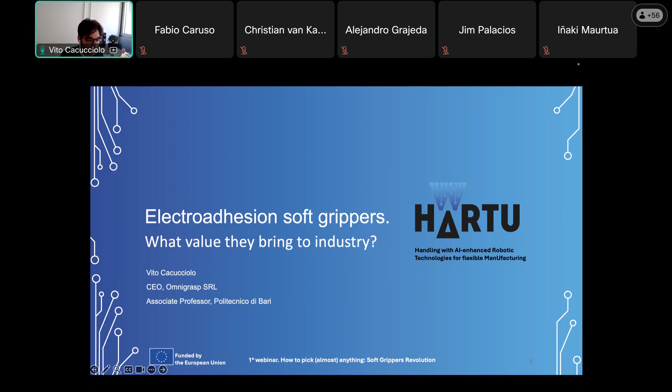So a few words about myself. I'm a mechanical engineer by training. I've got a PhD in biorobotics at Scuola Superiore Sant'Anna, Pisa in Italy. I worked as a scientist at EPFL for 5 years, where I started to work on electroadhesion in two of the world leading labs on soft grippers with electroactive contacts - the labs of Professor Dario Floreano and Professor Herbert Shea. I then started Omnigrasp as a result of the research developments we made during these years, from 2017 to 2021. Omnigrasp was incorporated as a company in Italy in 2022, so it's a pretty young company.

In parallel to being the CEO of Omnigrasp, I'm also an academic. I'm an associate professor now at Politecnico di Bari. I'm an ERC grantee - I received the ERC starting grant from the European Union last year. The project, my ERC, started this year, and it's about artificial muscles, so a complementary but different technology with respect to the one I'm going to present you today. And I'm also a research affiliate at the Massachusetts Institute of Technology since 2022.

The problem that we started addressing a few years ago when we began working on soft grippers with electroactive contacts is the fact that traditional robotic grippers are no good when handling objects that are delicate, made with soft materials, as you can see by the scared strawberry on the left. They also have a pretty hard time picking up objects with widely variable shapes and sizes.

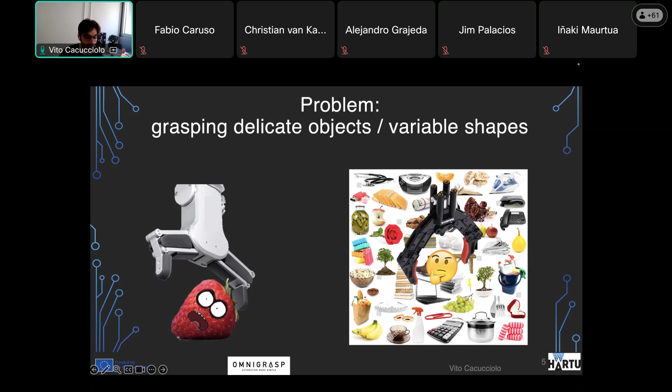So how can we solve this problem? My background is in soft robotics, so together with my colleagues at EPFL, we started investigating how we can use a combination of soft materials and intelligence in the mechanics—what we call mechanical intelligence—and clever physical principles such as electrostatic forces that make it possible to create adhesion without any glue, an adhesion that can be turned on and off electrically.

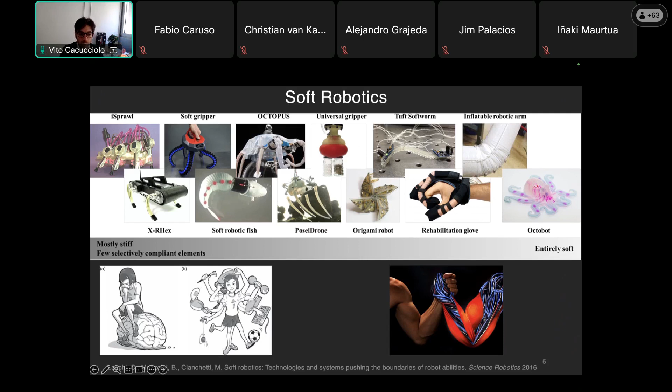By combining these elements—electrostatic adhesion, soft materials, and what we already knew about grippers and grasping—we created this soft gripper enabled with electroadhesion. In this embodiment you see in the video it has two fingers, each a thin silicone membrane with electrodes in it.

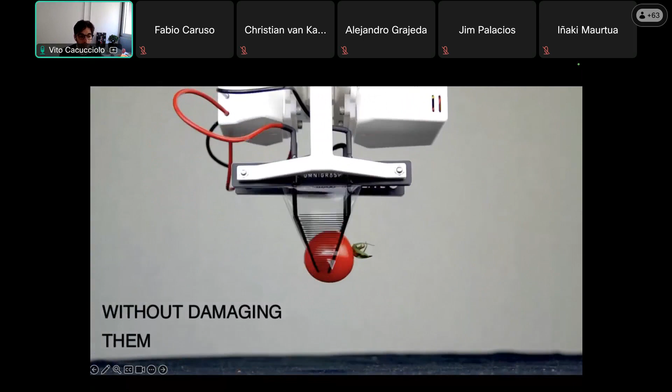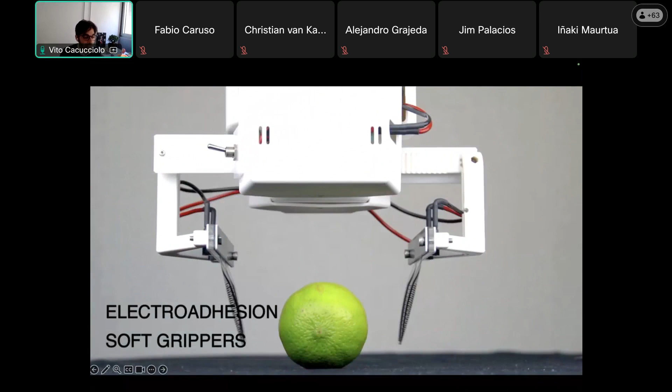This gripper is able to pick up a wide variety of objects. What's special is that it can do this without modulating the force it applies, because the fingers are so thin and soft that there's no way they can damage the object. Even if the positioning is wrong, even if they hit the object, there's no risk of creating damage or leaving a mark.

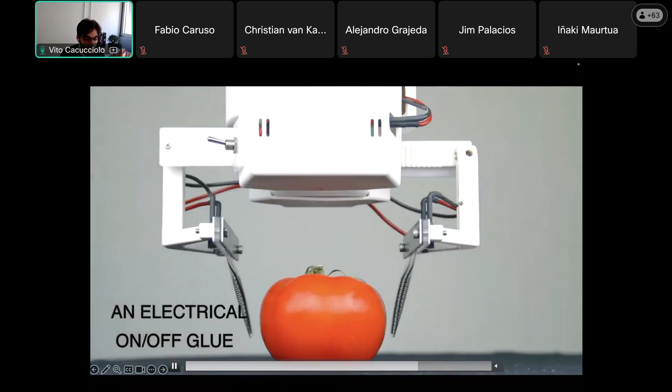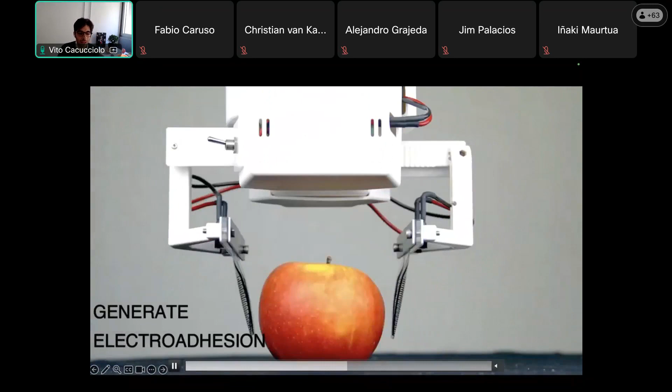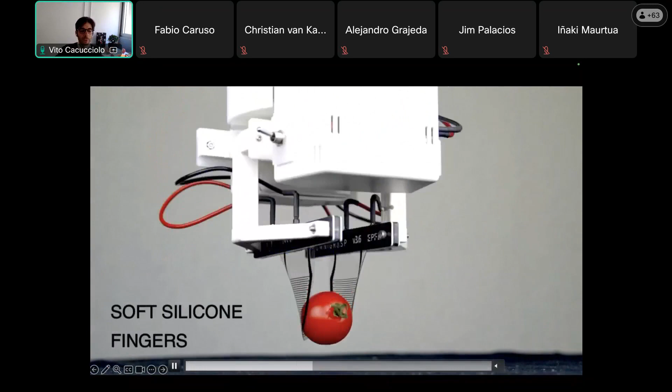At the same time, we engineered these electrostatic forces after many years of research to be able to lift heavy weights—not just the few milligrams we're familiar with from rubbing a pen on a shirt to pick up tiny pieces of paper. Those are electrostatic forces too, but we engineered ours to pick up kilos, through a combination of materials, geometry, and understanding of contact mechanics.

As I was saying, electroadhesion works like a glue. When the fingers contact the object, we turn on the voltage on the electrodes embedded inside the fingers. This voltage creates an electrostatic field that, due to how the electrodes are engineered, works like glue, creating mutual attraction between the surface of the object and the surface of the gripper. The two stick together, and we can lift the object to pick it up.

I mentioned before this has quite some background. The first publication on this topic is from my colleague Jun Shintake at EPFL in 2016. He made this gripper using a combination of artificial muscles and electroadhesion—a great innovation. When I joined EPFL, I started working with him, pushing this technology forward from a low TRL proof of concept to something more robust that could be used in industrial scenarios.

The second video you see is one of my developments. I made this soft gripper so strong that we were almost breaking the rigid plastic frame when testing it—it was able to lift unexpectedly large amounts of force. I'm going to tell you what changed and why this became possible.

Then we started studying contact mechanics, understanding things like peeling, and we added an extra degree of freedom to open and close the gripper so we could always have optimal contact, because we understood that was essential for grasping objects effectively.

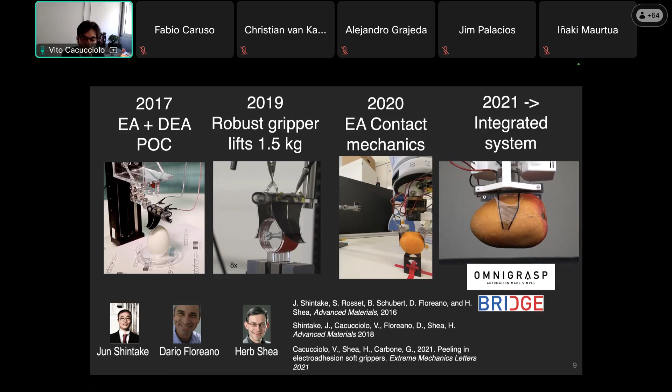And then we created Omnigrasp. We started receiving funding—the first came from the Swiss National Science Foundation—and we created prototypes that are now more industry standard, around TRL6, able to pick up large objects, adapt to different object shapes, and be controlled electrically with a computer and microcontrollers. This created momentum for the innovation that followed.

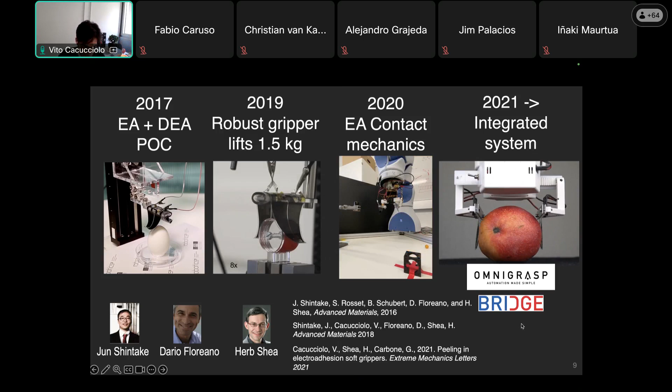So this slide is just to tell you that we have quite some background. I would say we are among, or probably the world experts on electroadhesion soft grippers. The technologies we developed, that we now have at Omnigrasp as pilots that we are implementing in industries already, come from over 10 years of university research. We have published more than 10 scientific articles on the topic that are widely cited.

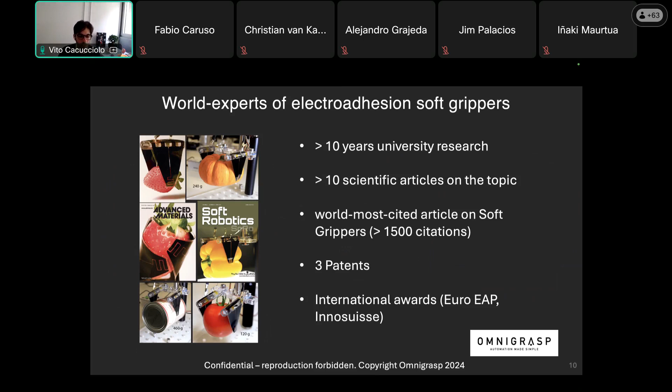There's also a little medal of honor. We published the world's most cited article on soft grippers overall, not only electroadhesion soft grippers, but all kinds of soft grippers. It's an article from 2018, and it already received more than 1,500 citations, which is incredible. We have 3 patents on various technologies, we are still patenting at quite a fast pace right now, and we received several international awards.

So let's dive a bit into the research that made all of this possible. One of the key innovations, one of the key things we understood for making these grippers so effective, is that electroadhesion was known already since many years. There are quite a few labs in the world that use electroadhesion, that developed it, that made different ways of fabricating and applying it. But most of these grippers were not good at picking up objects with complex shapes and different sizes. One key element we understood was the role of peeling.

We understood that electroadhesion is, at the end, not very different from all the other kinds of adhesion. I worked with colleagues here at Politecnico di Bari, like Giuseppe Carbone, who is an expert on contact mechanics. For the first time ever, we put together those two worlds, electroactive contacts and electroadhesion, and the world of contact mechanics. We developed a model that we decided to publish because it was so good we didn't want to keep it only for us at Omnigrasp, but wanted the scientific community to know about it and be able to use it. In fact, I've seen many grippers after this start to use movable fingers, following what we developed and invented.

Because we understood that by having the optimal contact angle between the electroadhesive and the object, we could change the force generated by orders of magnitude, going from millinewtons that people often got when approaching objects with the wrong angle, to kilograms - which is what we need in industry for pick and place of objects. This model was published in 2021 in Extreme Mechanics Letters, and it's also a highly cited paper.

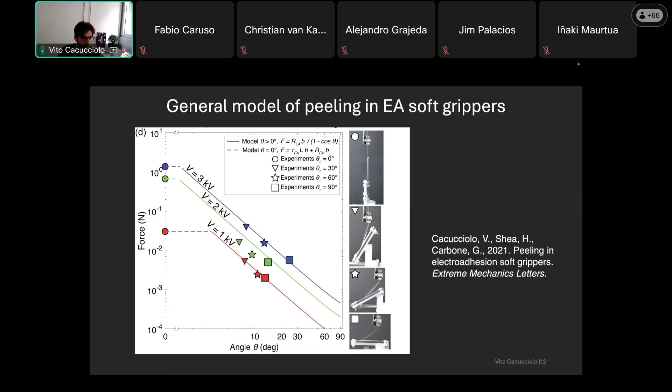Then we went a step forward. This was with my student at the time, Massimiliano Mastrangelo, a PhD student at Politecnico di Bari. We moved a step forward to say, okay, if we have peeling, we understand the force is very low, so we want the fingers parallel to the object. But then what happens if we go underneath the object? That was another important understanding - if you go underneath the object, the physics changes a bit. We developed a model that explains why the force keeps pushing forward and actually increases exponentially with this angle of wrapping of the fingers on the object.

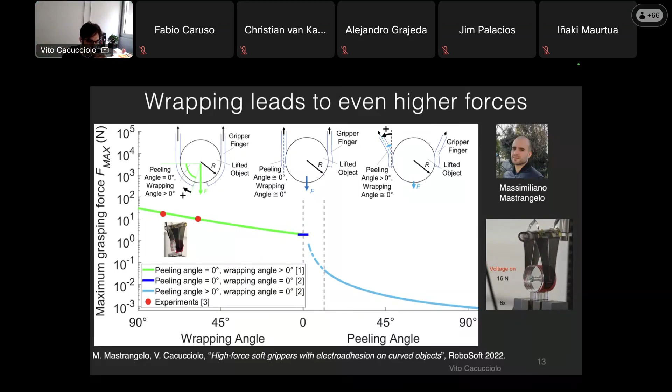This is what made possible the crazy stretching and huge weightlifting ability of this gripper from a few years before. We observed this, but we didn't understand why it was the case - we couldn't model it. Then with Massimiliano, this became possible, and we published an article on this topic too.

But then, knowing we wanted to wrap around objects, we started wondering how can we do that? We don't want to add actuators, because that's bulky, makes the electroadhesive more rigid, can damage the object, and makes the system more complicated. So can we directly use the electroadhesive to wrap around the object?

Here came another very interesting study with Massimiliano again, and also Fabio Caruso, a PhD student just finishing now at Politecnico di Bari, and again with Giuseppe Carbone, who understands very well the interfaces between different objects and the contact at the interface. We understood how to make the fingers spontaneously zip onto the object, even at large curvatures, small curvatures, large bending angles - like the one you see in the video - by properly designing the mechanics and the electrical part of the electroadhesive finger.

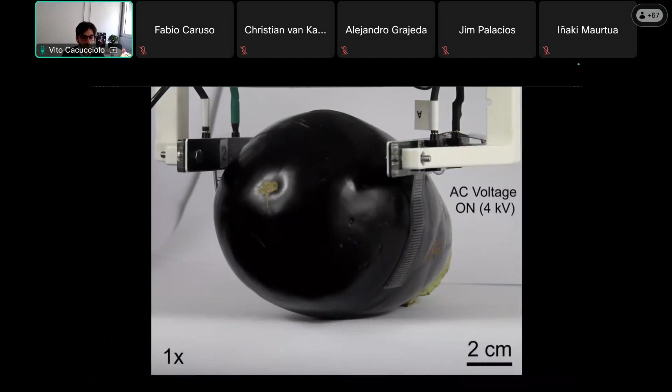This was another very important breakthrough that, again, we decided to publish because we want the scientific community to know about it. It made it possible for our grippers to spontaneously adapt to objects of different sizes and shapes without having to add external actuators. So it's possible to design the fingers for a given curvature.

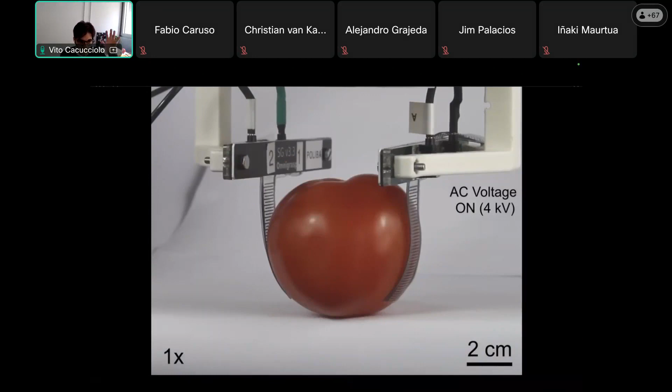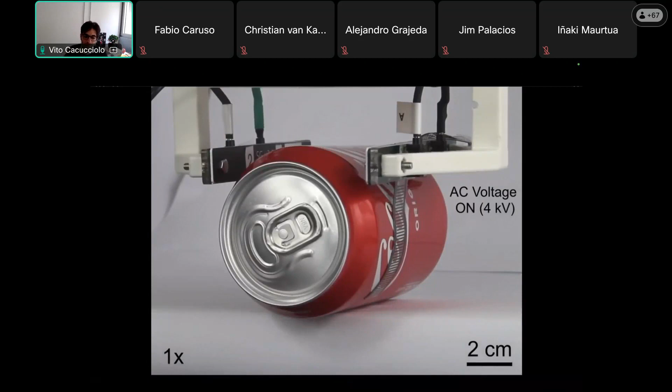So if we know that we want to grasp objects that have a minimum curvature of a given value, or a maximum curvature of a given value, then we can now do so. And we decide how thick the dielectric needs to be, how long the fingers need to be, how much voltage we need to apply in order for this to happen.

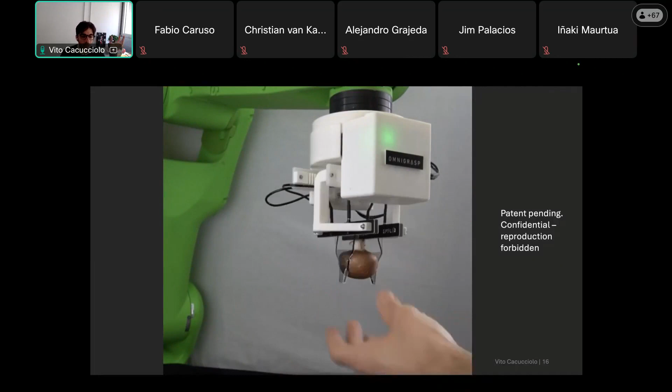So all of these technologies combined made it possible to develop these grippers that I was showing at the beginning, that can adapt to a lot of different objects, that can go from small to large, heavy to lightweight, and made of different materials, from plastic to food material, metals, cardboard. This is really remarkable, how adaptive it is and how robust it is also.

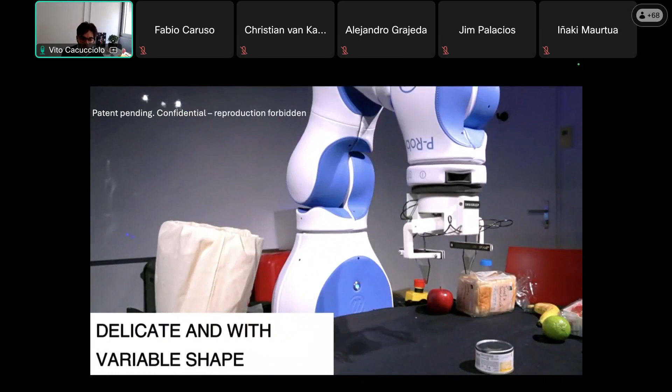So this demo here, the gripper is basically blind. It's grasping objects, just adapting passively to its shape and size. We are only telling it where the object is and how much it needs to close, but very roughly. And that's it, no sensors, no feedback loop.

Then, of course, we want sensors and feedback loop. Now we are developing them, and for example, they are part of the HARTU project. But of course, as you can imagine, it's much easier to sensorize and make smart a gripper that intrinsically, mechanically, by its own physics, can adapt to the object, rather than something that, if you don't put a bunch of sensors on it, is just going to crush your object.

And so you have to be very careful with your sensor. You need very high computational speed. While in our case, for our grippers, it's relatively easy to sensorize them, because just a little bit of extra smartness is enough to make those grippers really adaptive and intelligent.

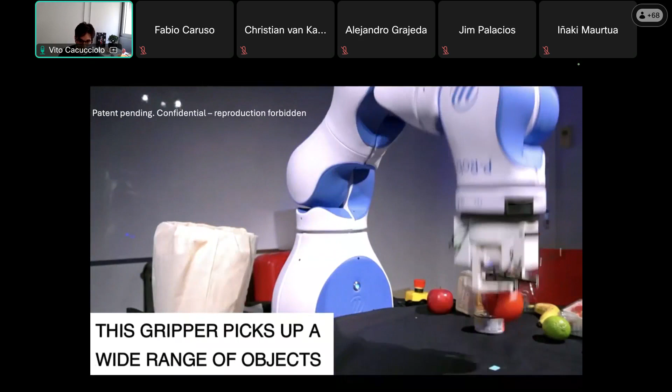So here came a first project funded by the European Union, which is the Merging project, that we kind of joined in the middle because one partner left, and then we were the ones that had the right technology for the project. So we joined 1.5 years ago, and the goal of this project, because the project is finished now...

It was closed at the end of last year, was to help bring back some manufacturing to Europe in those fields where there has been a lot of outsourcing to developing countries because of the intense labor that was required. In particular, one of the industries that we focused on is the textile industry, where robotic automation is pretty difficult because picking up textiles is very hard.

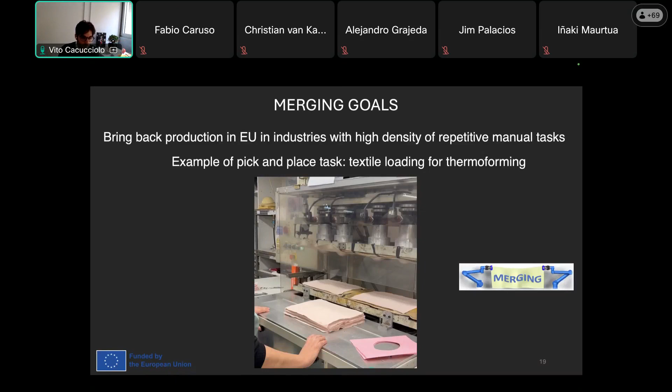It seems pretty easy, but the very hard part is, how the hell do we grasp a stacked textile? How do we grasp a piece of textile when there are other textiles underneath? That's very hard for a robotic hand. And we thought electroadhesion would come in handy here, would make it possible to do this kind of difficult grasping.

So when I was at EPFL, when this was developed initially with my colleagues Herb and Krishna, we invented this method for grasping, where we use electroadhesion only to lift one of the corners of the textile on top, which is something that electroadhesion can do very well. It's very difficult to lift the whole textile unless we use a rigid gripper that is the same size as the textile, because the electroadhesion pressure we can have on textile is not very large.

Because, you know how textiles are, there is not a lot of density of material. They are pretty empty. So electroadhesion needs to grab onto material, and if there is no material, there is nothing to grab onto. Then we found this way around where we only grasp a corner.

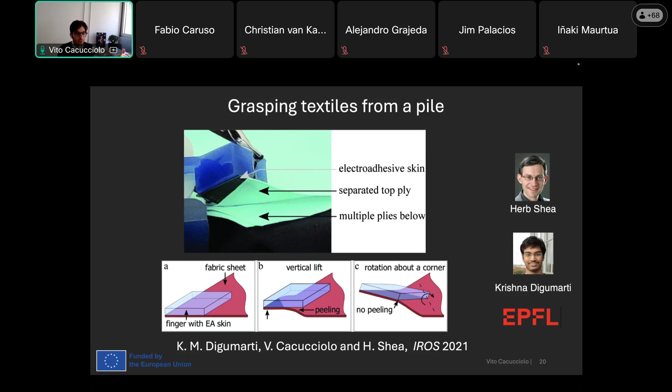You can see a video here that shows how this is done. And again, by our understanding of peeling, we designed the kinematics of this motion. This is something we deposited a patent on, the kinematics of the motion, so that the peeling wouldn't happen and wouldn't let the corners slip down.

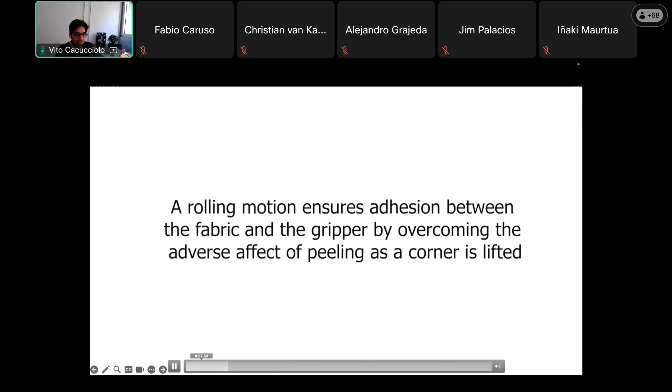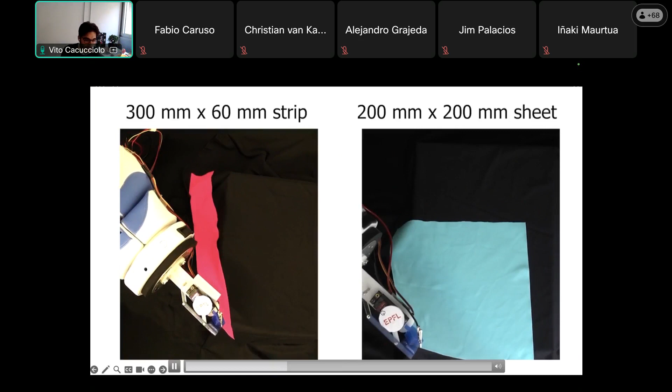And then, after we peel the corner, we are now able to pinch the textile, and at that point, after pinching, everything becomes a piece of cake. It becomes easy to move the textile around as we would do with our hands, as the operator does at the moment. And so we demonstrated that it was possible to pick up textiles of different sizes and shapes. And since it's on the corner, the textile can also be all crumpled, and we can actually open it up.

It doesn't have to be nice and flat to start with. But there were some problems with this gripper. As you can see here, the kinematics is not very well developed. The connections are, well, as you would do in a lab for a demonstration. The kinematics is such that we can also only pick up from the corner of the table. So this was no good, of course, for industrial use.

Then we pushed forward the innovation here at Omnigrasp during the project merging, and we created a different kinematics that can now pick up from any point on the table. And the gripper was industrialized. It was made more compact with connections all included, made robust so that it could last for thousands of cycles.

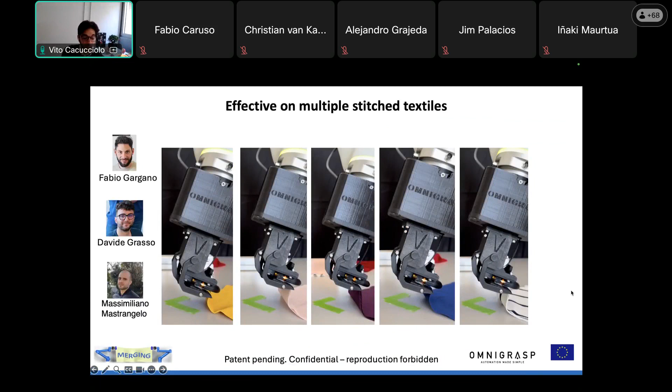This is work done by my colleagues at Omnigrasp, Fabio, Davide, and Massimiliano, who at the time, after his PhD, had joined Omnigrasp. And the results were fantastic. We were able to pick up a wide variety of textiles and to pick them up from any point on the table, repeatedly. So now we can pick up even stitched textiles, and we can separate layer by layer.

And this is one of the examples of the testing that we did. We designed an automated testing setup where we could test for thousands of cycles and check that the system was robust and repeatable.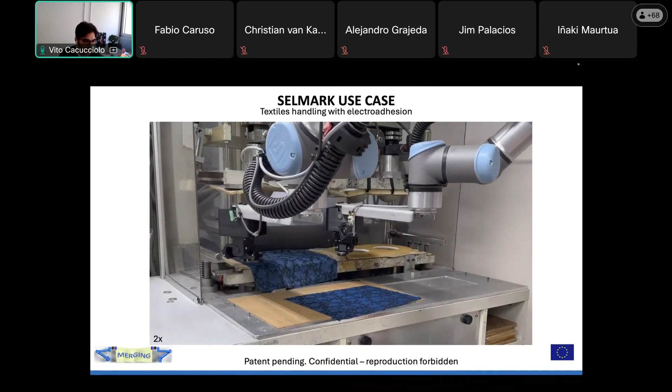Finally, at the end of the project, with our colleagues at Timon and all the support from the other partners, we integrated this at the facilities in Selmark, and we demonstrated that it's actually possible to do the machine tending that we were supposed to do with this project. So you can see here that we separate a piece of textile and do machine tending inside the heat press. And here is another example with another textile.

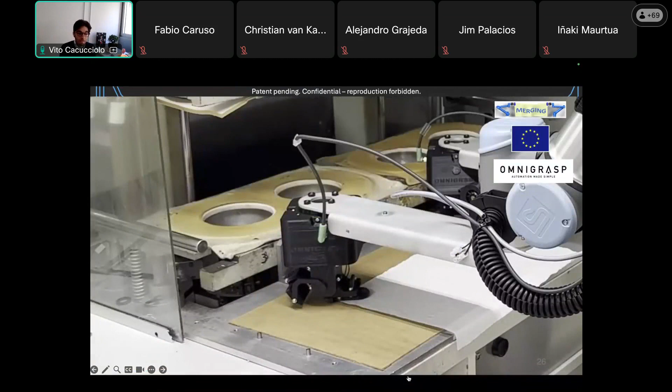So here there was a big step forward made also for the integration, because one thing is developing one device, another thing is developing the device and making sure that it can talk with all the rest of the system, with computer vision, path planning, robotic arms, the machine that we have to operate. So everything was put together in a nice system, and we demonstrated it could work well.

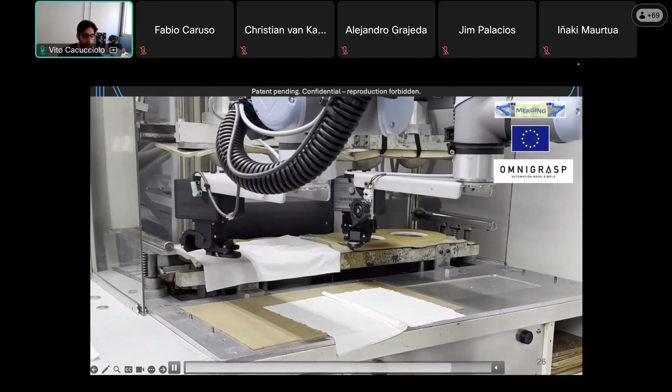And this is something similar to what we are working on now for HARTU. So developing a gripper for different use cases, but one that can then also fit in an ecosystem with all the different technologies developed by the other partners.

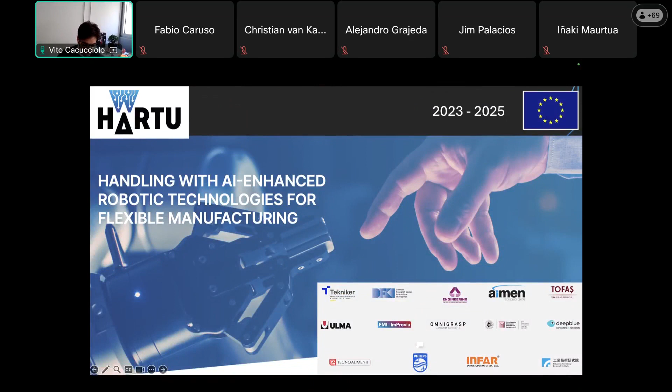And this brings me to HARTU, which, as I was mentioning before, started at the beginning of last year. Here is all the partners that form the consortium for this project. One of the use cases we are focusing on, we are back on food now, so it's a pick and place of fruit and vegetables.

And what we are planning to do with this project is to obtain seamless adaptation to different objects, so that, as I was mentioning before, we can get flexible pick and place in manufacturing. So it's possible to change from one object to the following one without having to replace or adapt the gripper, or to reprogram the automation line.

And also we want the gripper to be smart, to be able to recognize the objects and adapt its grasping posture based on the different objects and where they are positioned. And this will be done by integrating the AI technologies that the partners are developing.

This brings me to conclusion. I want to say big thanks to the Omnigrasp team that made all this work possible. I'm lucky to be working with super smart and creative people.

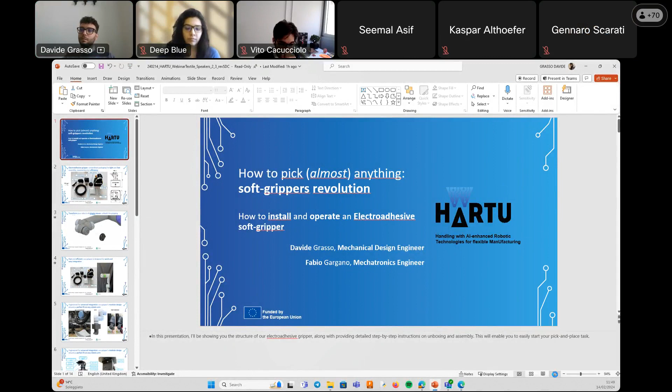Can you see my screen, right? Yes, yes, okay good.

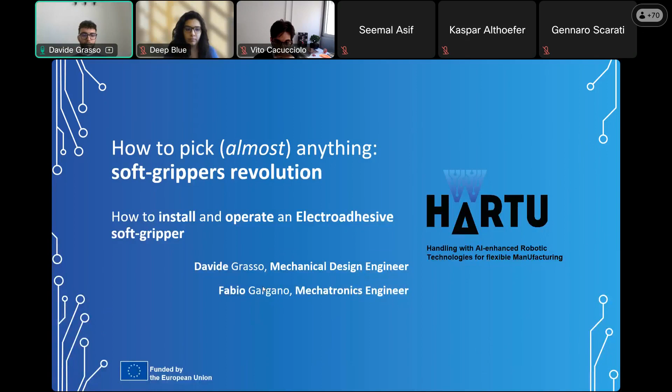In this presentation, I will show you the structure of our electroadhesive gripper, along with detailed step-by-step instructions on the unboxing and assembly. This will enable you to easily start your pick-and-place task with our cutting-edge gripper. Upon receiving our gripper, you will discover a thoughtfully compact packaging that efficiently houses the essential components. Inside you will find the electroadhesive gripper, the communication cable, and also an AC/DC converter.

I don't see your screen anymore, Davide. Sorry, I don't know what happened. Maybe try showing again. Yes. Like this. Okay, can you see it?

Yes, thanks. Okay, so I was talking about the communication box and cable, and also the AC/DC converter, aimed at continuously supplying power to the communication box. While the cable is provided as an added convenience, it's worth noting that it's not mandatory, as the gripper can also be controlled using the internal cables of the robot.

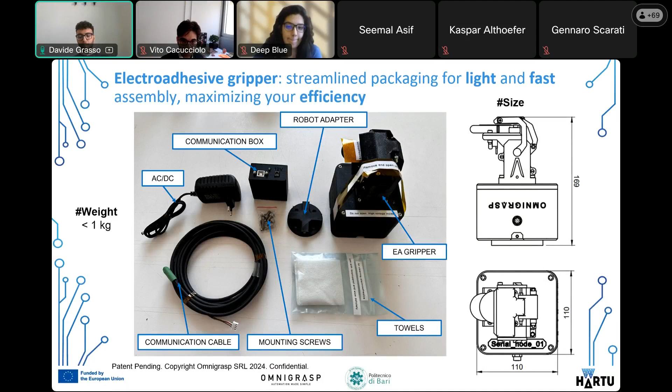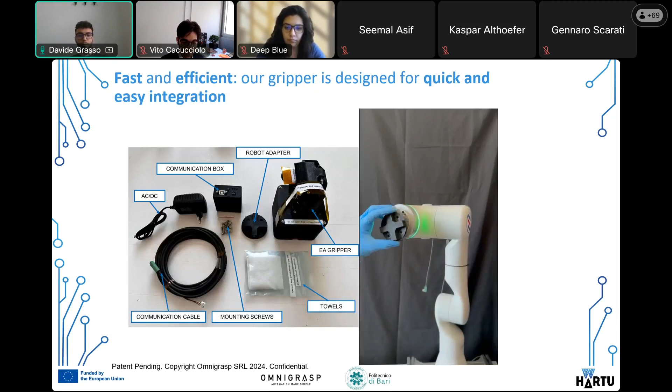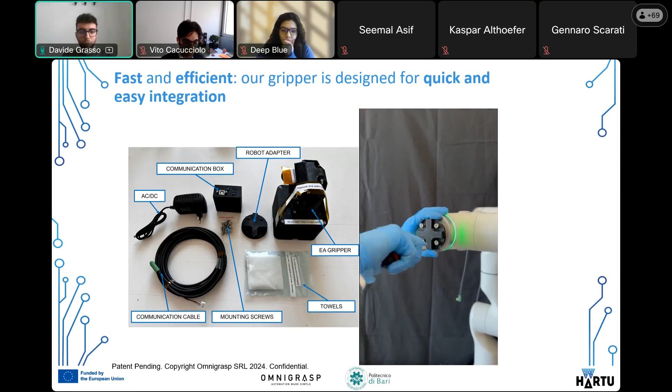Starting by placing the robot adapter on the wrist, aligning the holes, and securing it with the bigger screws using a screwdriver or Allen key. Following this, place the gripper on the adapter according to the cross path on it, and secure it with the smaller screws. With these steps completed, the gripper is now ready to be connected to the controlling computer.

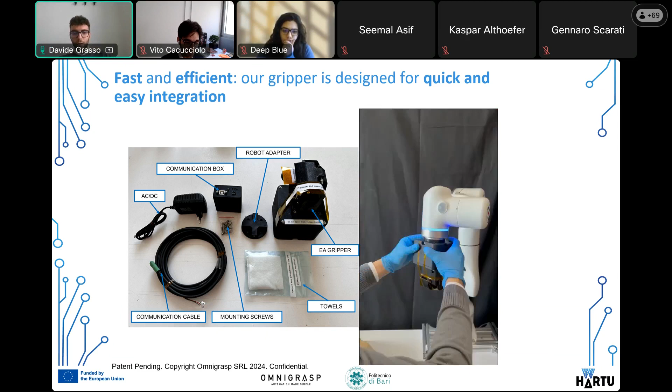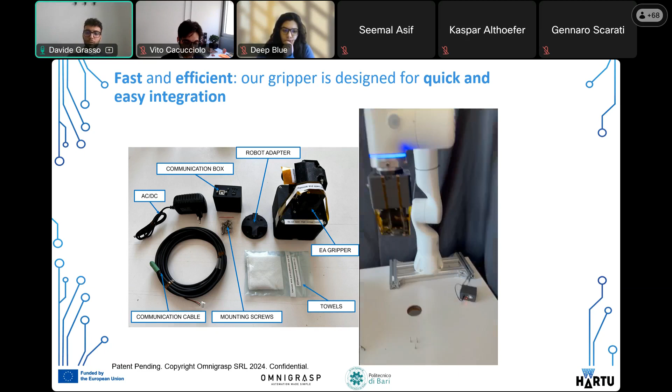The next steps involve connecting the communication box with the electrical line through the AC-DC converter provided, then plugging the communication cable's female end into the gripper's male port, fixing it with the nut provided. Subsequently, connect the communication box, establishing the link between the gripper and the controlling computer using a USB Type-B cable. This configuration facilitates seamless control and operation of the gripper directly from the computer.

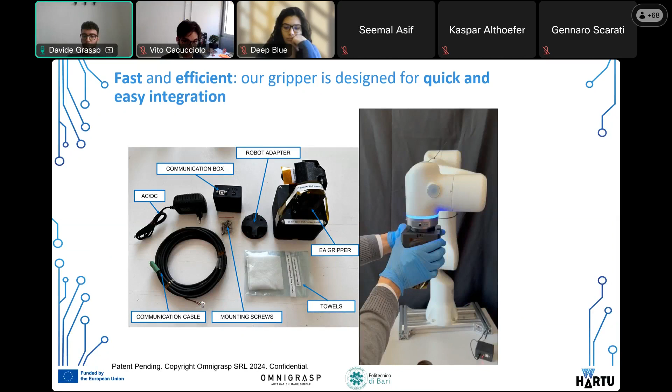As you can see, the installation procedure lasts less than 5 minutes and doesn't need any kind of expertise. Now we are done with the physical installation, and we can have a look at practical mounting.

Each robotic arm presents its unique dimensional constraints. We can create a custom-made robot adapter in less than an hour once we are aware of your dimensional constraints, by rapid prototyping with 3D printing.

After giving you a sneak peek into its assembly, let's uncover the fascinating wonders concealed inside together. As you can see, the components are numerous, each playing a specific role crafted through extensive mechanical study. For example, the TPE interface combined with the electroadhesive features make the gripper soft, proficient in handling fabrics with the utmost care, leaving them unharmed.

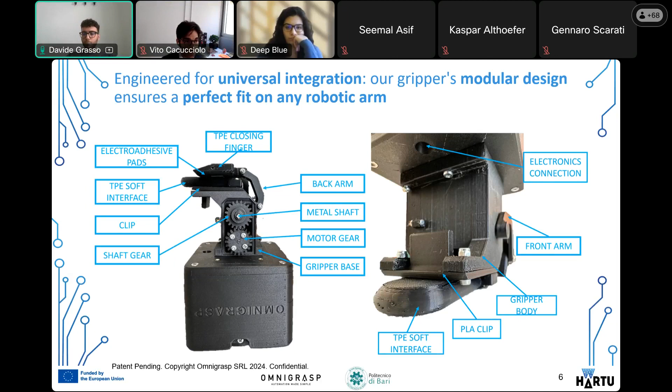Good morning, can you hear me? Yes, yes. Okay, can you share my screen? We see your screen.

Here we have an example of an operational setup configuration. The gripper is mounted on the robot wrist and ready for use. The black case encloses the power electronics within the gripper.

The communication between the gripper and the PC is allowed through an M8 cable, which transmits input and output signals. This cable is connected to the box shown at the bottom right, labeled as the COM box. The COM box allows communication between the gripper and the PC and also acts as a power supply.

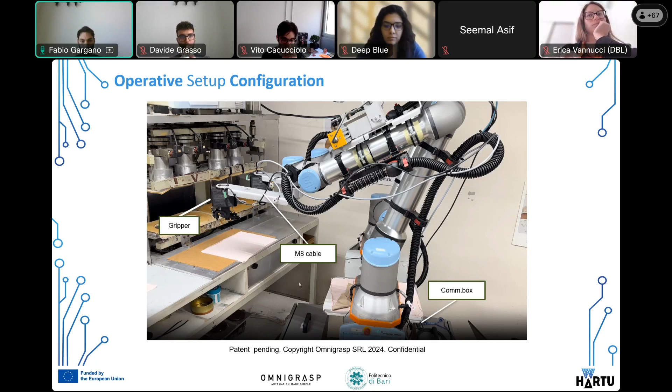These are the primary components that define the communication and power supply system of the gripper. The electronics control are completely housed inside the case, enabling communication through an M8 connector placed on the side of the gripper. The cable has two main lines, one for power and one for data. This cable connects to the communication and power box, which has two connectors on its side: the first, on the right, is a jack connector used for input voltage, 12 volt; the second, on the left, is a USB-B connector, essential to allow communication between the gripper and the ROS master.

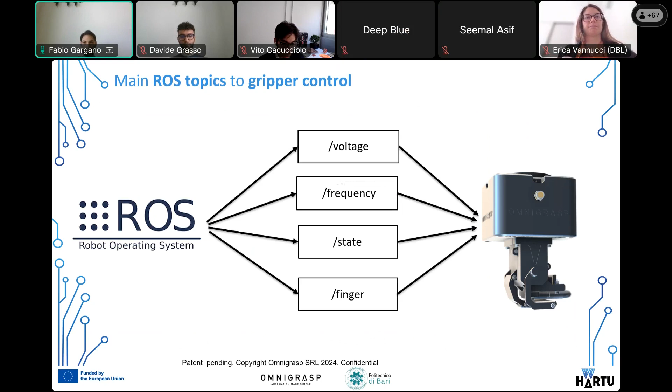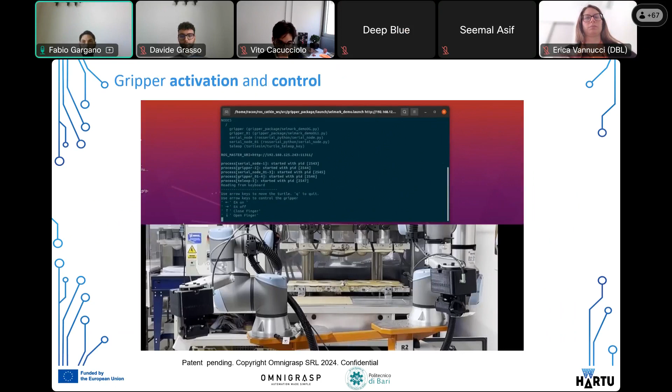To start using the gripper, connect the power to the box, then connect the USB cable to the PC. Now connect the gripper and launch ROS, so the gripper is ready for use. In this window, we are running the demo file, allowing activation and deactivation of electroadhesion, and opening and closure of the finger. This can be done interactively using a command from the PC keyboard connected with ROS.

Now we see a practical application of the demonstrator. Explore a successful case from the MERGING project where the gripper was correctly integrated at the Selmark facilities in Vigo.

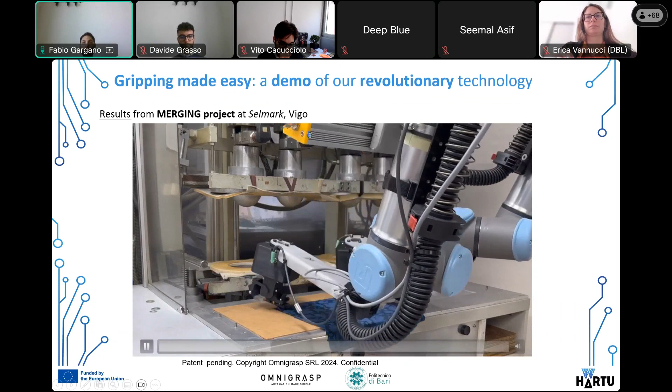Particularly, we can see how the ROS master coordinates two robotic arms that work simultaneously. The computer vision recognizes the position of the corner textile, then both robots move to this position. Now electroadhesion is on, and the gripper grasps the fabric. After this, the robot places the textile in the thermoform and releases it.

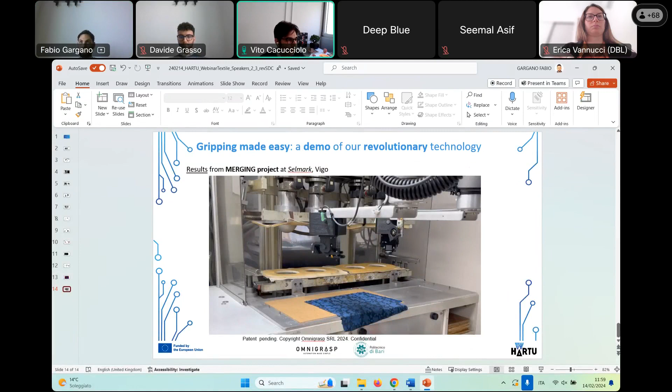I think we have a Q&A before we move on to Simone, or is it directed at the end? Actually, we have it later, Vito. So okay, sorry Simone, yes please go ahead.

Don't worry, I hope you can hear me. I guess yes, and you can see my screen. So good morning to everyone.

Let's move on to the final part of this webinar, where we'll sum up the goals of the HARTU project. I am Simone De Carolis, a researcher at the Mechanical Engineering Department at Politecnico di Bari, and together with Omnigrasp, we are trying to bring into HARTU our knowledge in contact mechanics, modeling, and design of electroadhesive grippers, as Vito showed before. Our aim is to assist European manufacturing companies in transitioning towards Industry 5.0, also known as collaborative industry. This talk will outline some of the goals pursued by the HARTU project to facilitate this transition. After providing a brief overview of HARTU and describing some industrial scenarios we are working on, I will highlight the roles of Poliba and Omni in the project before concluding with the expected results and outcomes.

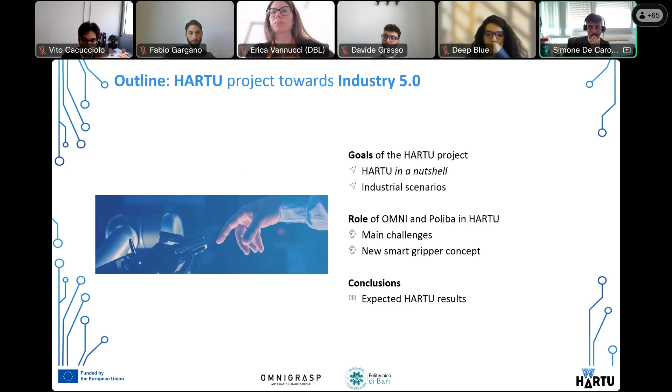Let's start by recalling the meaning of the acronym HARTU. HARTU stands for Handling with AI-Enhanced Robotic Technologies for Flexible Manufacturing. This means HARTU is an industry-driven research project focused on solving the main challenges related to handling parts in manufacturing lines using new grippers enhanced with artificial intelligence control. The project aims to apply this innovative solution in real industrial scenarios to develop tools that can handle various products regardless of their shape, materials, or size.

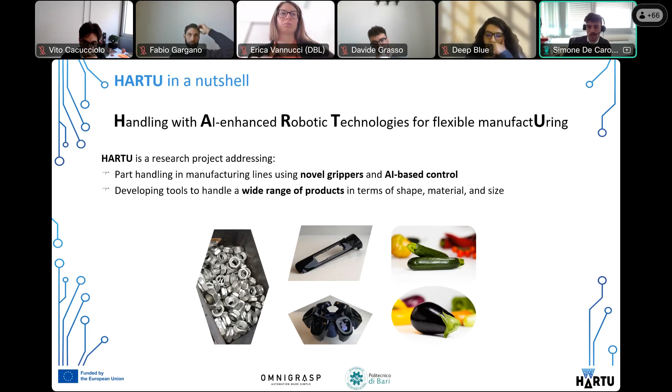In the figure, you can see some of the products that are part of the project case studies. These range from typical mechanical components to those in the consumer goods industry and even food products. Such a wide range of products already illustrates the primary aim of the project: to offer a solution applicable across much of the manufacturing sector, which is vital to Europe due to its large number of enterprises, jobs, and its significant impact on the European Union GDP.

But why focus on handling technologies? The reason is simple: over 80% of operations on production lines involve pick and place tasks, which can be carried out by either humans or robots. However, conventional industrial robots are often limited by specific features for each component.

So this makes it difficult to perform transition to more flexible solutions where a single gripper can handle various types of objects. Flexibility is one keyword of the project, driven by recent trends in mass customization and e-commerce, which demand a wide variety of products in small quantities, and these also add challenges in standard ad hoc programming for manipulation tasks.

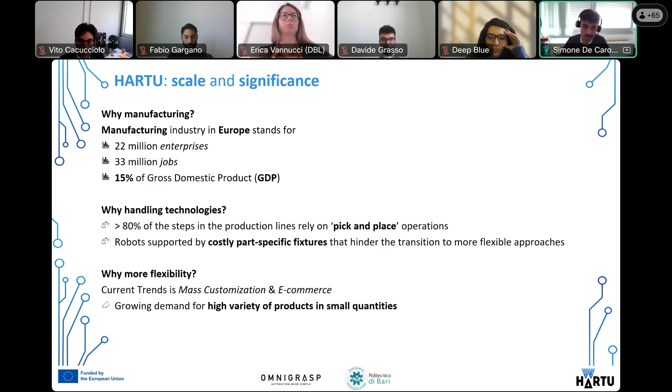With HARTU, our aim is to address the need for flexibility in manufacturing. We'll achieve this by developing new gripper concepts based on electroadhesion, which also take benefits from AI learning techniques. These technologies will continuously adapt to the task at hand. Additionally, we want to bring recent scientific advancement in soft materials to the industrial world, hoping to improve the adaptability of manufacturing processes and make production lines more flexible and efficient.

The aim is to develop an effective and intelligent AI-enhanced system that can overcome the difficulties associated with the complexity of various working environments - one system that can learn and improve its capabilities over time.

Here are some key numbers related to the HARTU project. It spans a duration of 3 years, starting from January 2023, and involves collaboration among 14 participants, including research organizations, system integrators, and communication experts. Among these participants, there are 5 manufacturing companies, with 3 based in Europe, 1 in Turkey, and 1 in Taiwan.

The project focused on 5 case studies covering different industrial realities, including automotive, consumer goods, logistics, and food industries. Over the course of the 3-year project, HARTU researchers will work closely with these 5 industrial companies, studying their production processes and developing innovative robotic components to enhance flexibility of production lines - meaning to enable the same robot to learn to manipulate and assemble a wide range of objects.

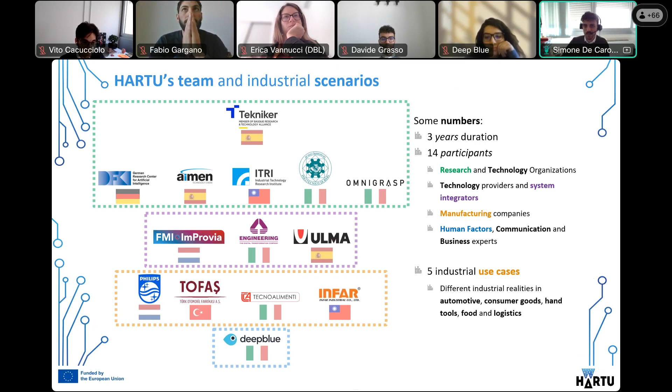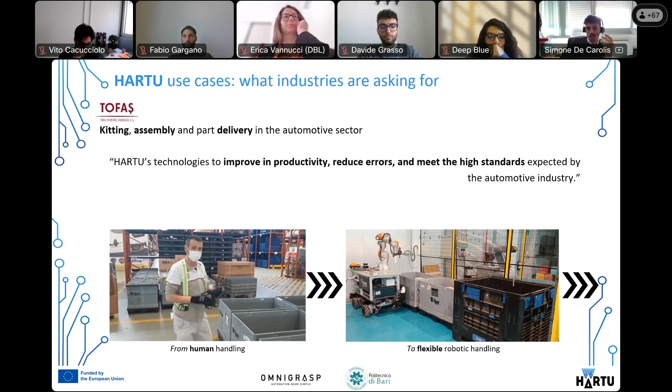Looking ahead, we envision the implementation of mobile manipulators equipped with a vision system to enhance flexibility and efficiency in both kitting, assembly, and spare part preparation. This configuration offers versatility across different tasks. The transition is therefore toward robotic mobile handling. On the right, you can see an initial scenario we are reproducing in the laboratories of Tekniker.

As a second example, the use case at Ulma. Ulma provides logistic solutions, including automatic warehouses and pick-to-light technology. Currently, manual handling of items for their preparation is challenging due to various factors: the vast number of different products, lack of universal grasping tools, small order sizes, and so on. So in the future, what Ulma envisions is robots equipped with vision systems handling order picking autonomously based on instructions from the warehouse management system.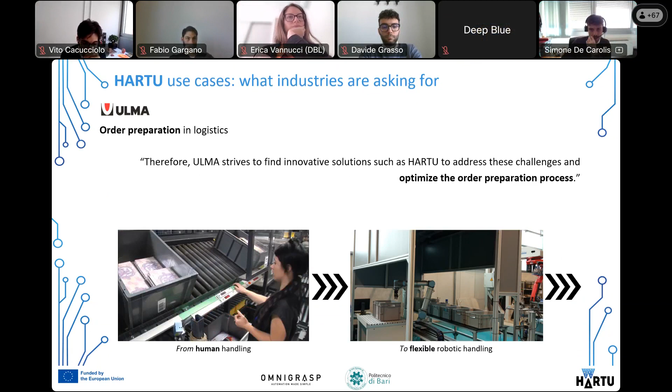Last but not least, let's go from automotive to logistics and then to a food sector case study. This use case focuses on optimizing processes in food warehouses, specifically sorting and packaging operations for a variety of vegetables. Currently, these tasks are performed manually, posing challenges such as high costs and potential hygiene issues. Looking ahead, the vision is to implement collaborative robots capable of handling vegetables of various sizes, shapes, softness, and so on, even when randomly distributed.

These robots will operate safely alongside human workers, and the aim is to develop a more efficient and ergonomic workspace, like the one you see in the center of the slide - an early stage of the project at Tecnalia Laboratories again.

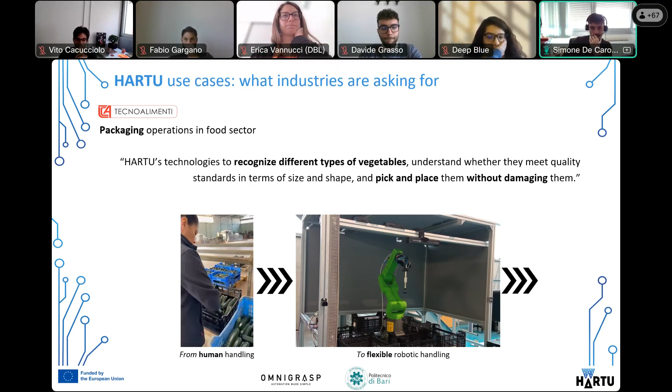These are just a few of the scenarios within the project that already demonstrate how improving the efficiency of these manufacturing systems can impact the European economy, considering the sole production value of sectors like food, for example. The case study proposed by Tecnoalimenti represents for us an opportunity full of interesting research and development challenges.

In fact, this project is challenging due to the features of the environment where bin picking is required. Factors such as the variability of products to be handled, the unstructured environment, the complexity and irregularity of surfaces to grasp, and also the very delicate nature of products suggest that manual handling may be the only feasible solution, or it requires the use of a gripper equipped with a lot of flexibility and also robustness.

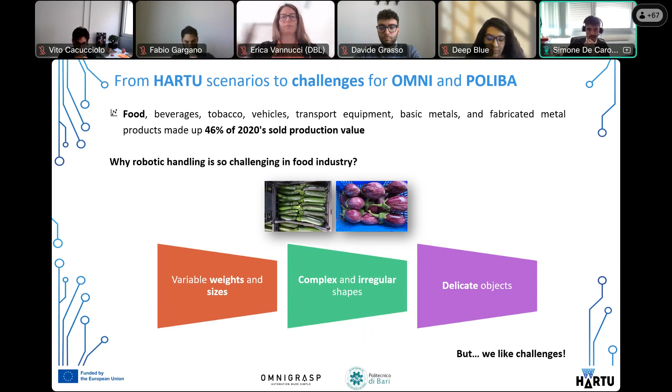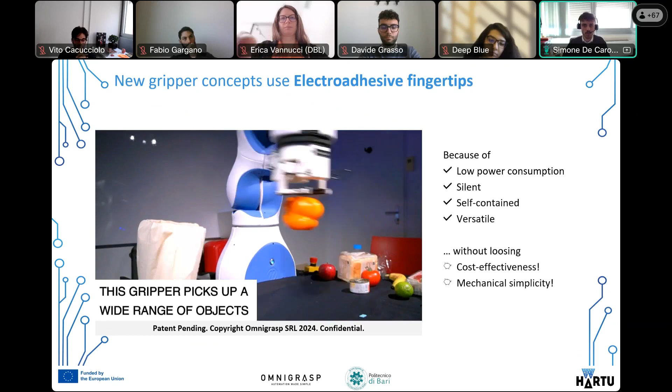New grippers equipped with electroadhesive fingers can fulfill these requirements thanks to the use of compliant fingers, as Vito presented before. Electroadhesion utilizes electrostatic force, which is gentle, enabling the grasping of delicate objects with simple control. In the demonstration video, you can see the flexibility of a gripper equipped with electroadhesive fingers in handling objects of various shapes and sizes.

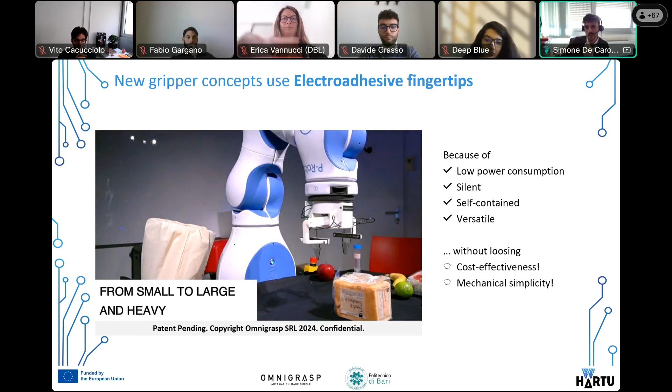Furthermore, the use of electroadhesive fingers enhances the functionalities of this gripper while maintaining relatively simple and cost-effective mechanics. These grippers are presented as tools that are noiseless, self-contained, low consumption, and versatile.

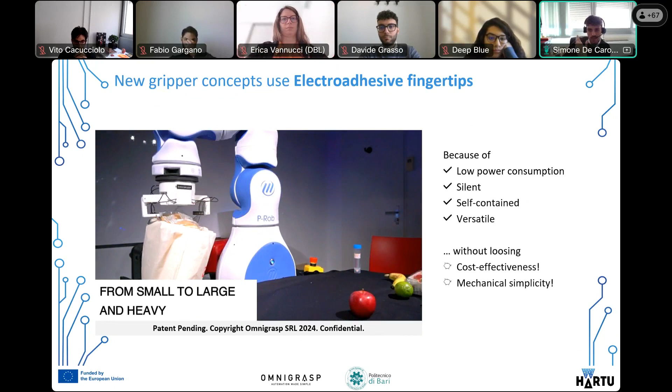Electroadhesive fingertips can also be used as capacitive sensors like this, so they are potentially equipped with mechanical intelligence. This offers the advantage of measuring not only contact with the object but also electrical properties of the object, meaning that they can recognize the object being handled and adapt the force to its size and weight.

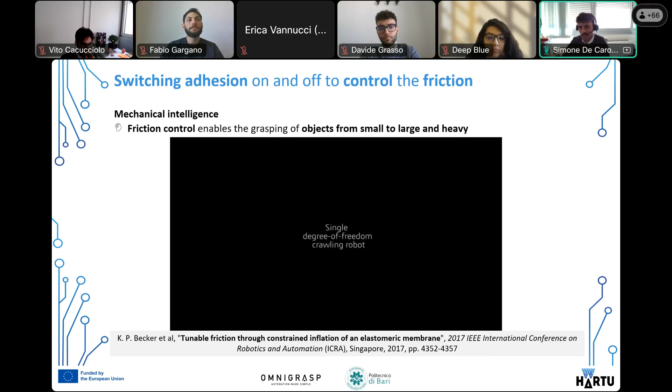Another feature that allows us to speak of the mechanical intelligence of electroadhesive fingers is the ability to switch adhesion on and off to control the friction coefficient. This video demonstrates the utility of the tunable friction mechanism in two applications.

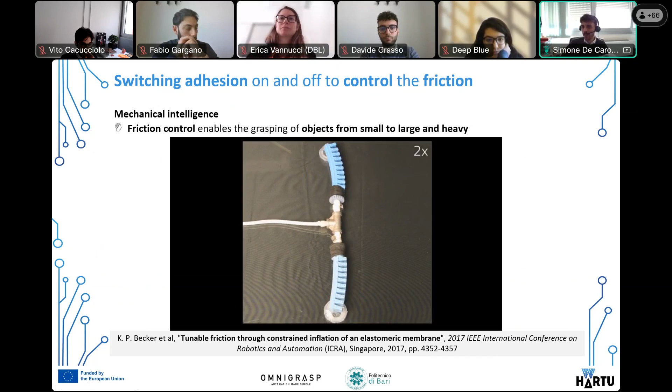The first one is a 1 degree of freedom crawling robot that propels itself forward through asymmetric friction on the ground. The second one is a multiple degree of freedom soft gripper that uses friction differential on its fingertip to successfully screw in a light bulb.

So this is our concept to bring into industries some advances in research, like the one of capacitive sensing and this one on tunable friction tools.

Last but not least, the mechanical intelligence provided by the electroadhesive fingertips can be enhanced by combining AI-based components from other pillars of the project. Some of the benefits that can result from this synergy are related to eliminating manual grasp programming through self-supervised grasp planning, and simplifying robot training for assembly tasks using programming by demonstration and advanced control techniques for managing contact interactions.

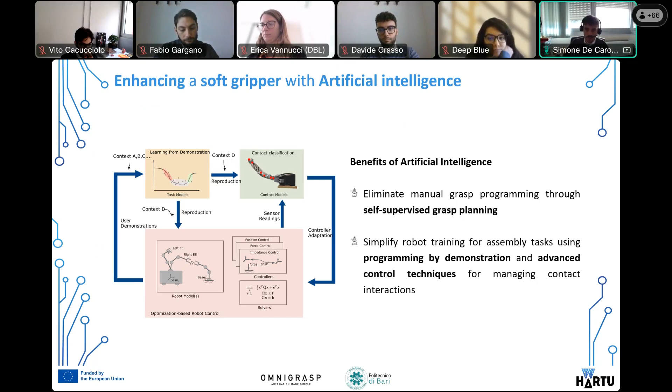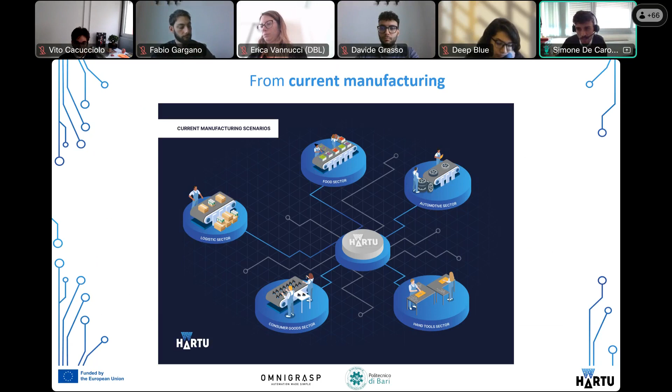As we wrap up, let's reflect on the key points of the HARTU project. Our goal is clear: to speed up the shift towards greener and more digital manufacturing and construction sectors. We've been working hard to create production lines that are super flexible and efficient, perfect for making customized products while reducing mistakes. Our approach is open, making it easy for factories to use our technology.

With HARTU, we're making robots smarter by adding artificial intelligence. This means they can learn to grasp objects on their own and handle complex tasks more easily. But as we move forward, we're also keeping people in mind, focusing on how humans interact with these new technologies, making sure they're easy to trust and use.

So in short, HARTU isn't just about fancy tech. It's about building a better, more sustainable future for manufacturing and construction.

We started with a question: how to pick almost anything. I would suggest the answer is just with a great team, such as the one in HARTU. I thank you all for your attention, and if you have any question for me, Vito, Fabio, and Davide, please ask.

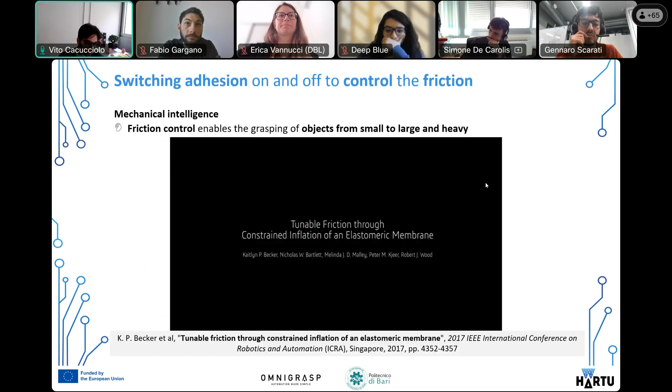Yeah, so we have feedback in voltage. It's possible to have a feedback loop in force if you add force sensors, like the ones Simone has shown. So if that is added somewhere on the fingertips or higher up, then it's possible to have a feedback loop. Spoiler alert: in HARTU we are developing closed loop grippers. So the voltage is already there, and we are also adding additional sensors now to have a closed loop gripper, because at the end that's what we want. Depending on what you need specifically, we can chat about what kind of feedback loop you need, but it's something that's already almost ready.